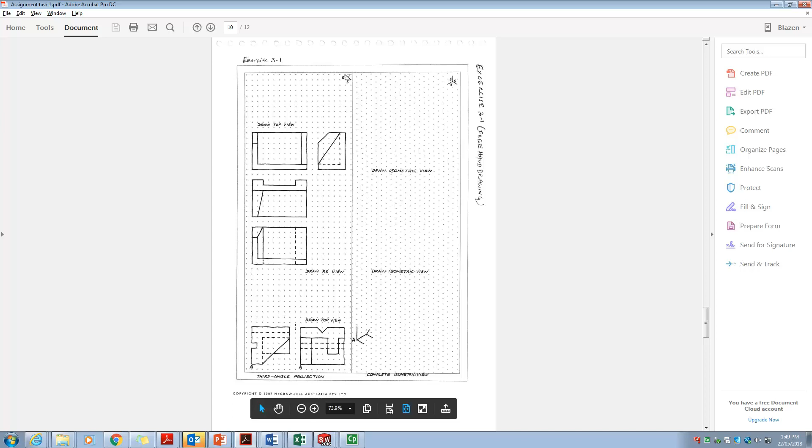So basically I'll show you as a solid. So this is the first one. So the problem would be here identifying different chamfer sections. There's quite straight chamfer sections here. So the front view, if you're looking at the front view, this is the front view you got. So you can see the edge which is chamfered. Then you got a 10 mil guide there.

Okay, so you can see the other principal views from the isometric to basically the top view. So you're looking at a top view, so you can come back here and see the top view and so on. So all I'm doing here is trying to help you out so that you can identify the visible edges and also the hidden lines.

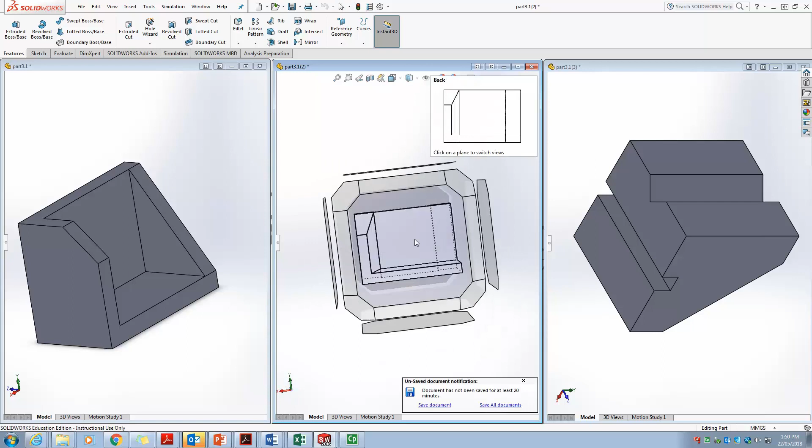So in this example here, you got a groove here. So basically when you're seeing it from the front, from this side, if I simply portray this one as a wireframe, you would be able to see those edges in the front, right? So this is going to be a thick edge, right, although it has got a hidden line here. But from here, if you're seeing this as a front view, you'll portray this line as a thick edge line and this as a dashed line, because that's the groove that you got on the other side.

Okay, so some of these views might really help you to complete those freehand drawings, the way they have been sectioned, the way in this case been chamfered. Majority of that will be a true scale that you draw in isometric. So this is another one, bit more complicated with the groove on the sides. Then there is a V groove or V notch on the other side. Then there's a few chamfers and an extrusion basically.

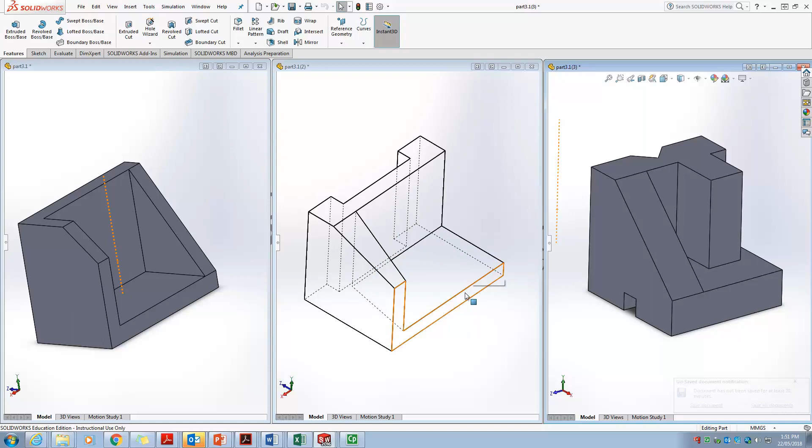Okay, so I'll just try to rotate it so that when you're trying to draw the freehand, some of these might really help you to complete the isometric, and also your principal views. So in this case the front view, the top view and the right side view. If you rotate this way, you can see the right side view here. So when you see the right side view, again you can put a cube like this as a right side view. You'll see a hidden line of the groove that is made here. If I come back here, I'll portray this one also in the similar way.

I have drawn this one in SolidWorks. It's much easier for me to put it as a SolidWorks file, but you don't need to open it as a SolidWorks part. All you need is to understand the geometry of that and the way the views are drawn. So in this case, I think the orientation of the part is somehow like this. You've been given a front view. So you can see the front view is given like this. Then you've been given a right side view.

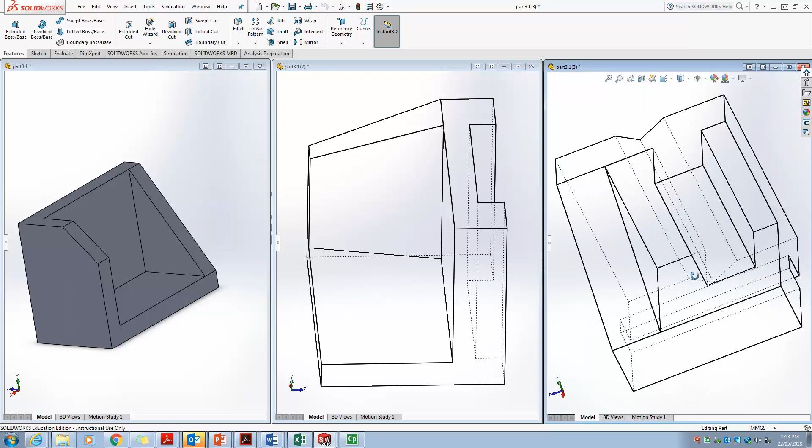So in this case the right side view is given, so you need to draw basically a top view. Okay, the top view will have the V notch lines, and you can see the hidden lines which are portrayed to represent some of the grooves you got with the block. Okay, so I'll also make this one a bit wireframe, so it's easy for you to interpret some of the hidden lines which are important when you're drawing an isometric.

Okay, so that's the way you can have a bit of understanding on the basic views, which are basically orthogonal projections, and your isometrics, hidden lines, and the visible edge lines. Actually, they are quite simple at this stage, because the isometrics become more complicated if you start putting a hole in one of the views and you're representing that hole as an ellipse in isometric.

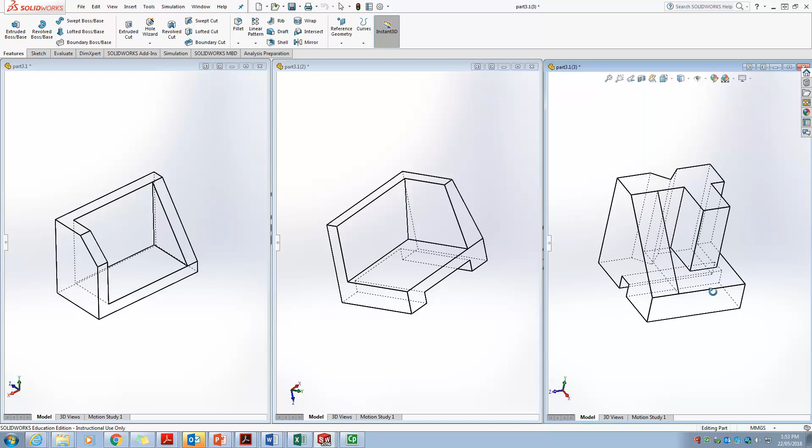So this is again the outcome expected for the isometrics, but I want you to basically understand and use those dotted lines which are given in your PDF to complete the 3 views and also the missing principal views.